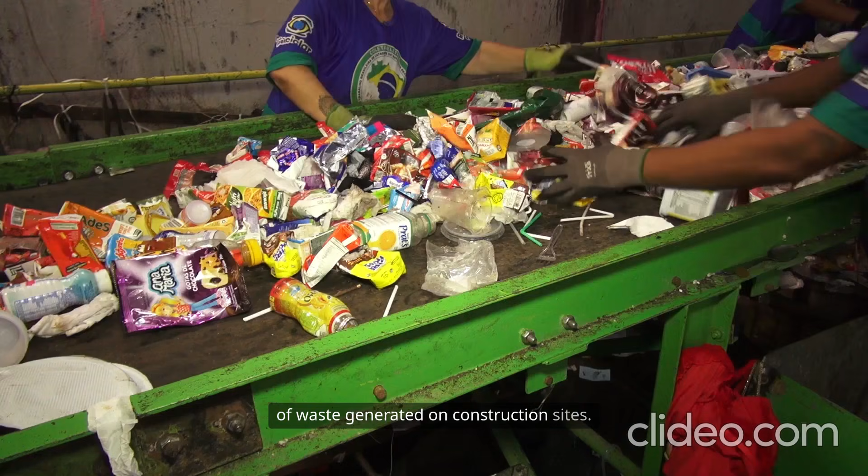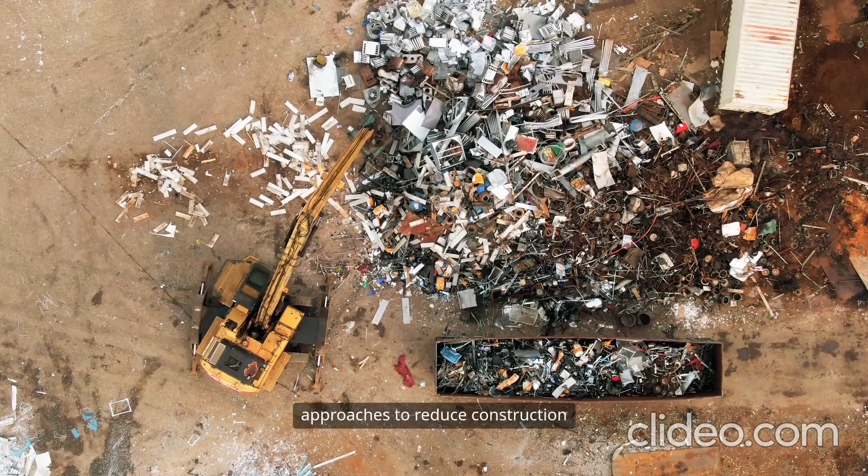Sustainability in construction is essential for minimizing the environmental impact of waste generated on construction sites. Effective waste management not only conserves resources, but also supports the socio-economic development of communities. By analyzing various sustainability theories and models, we can identify innovative approaches to reduce construction waste and enhance project outcomes.

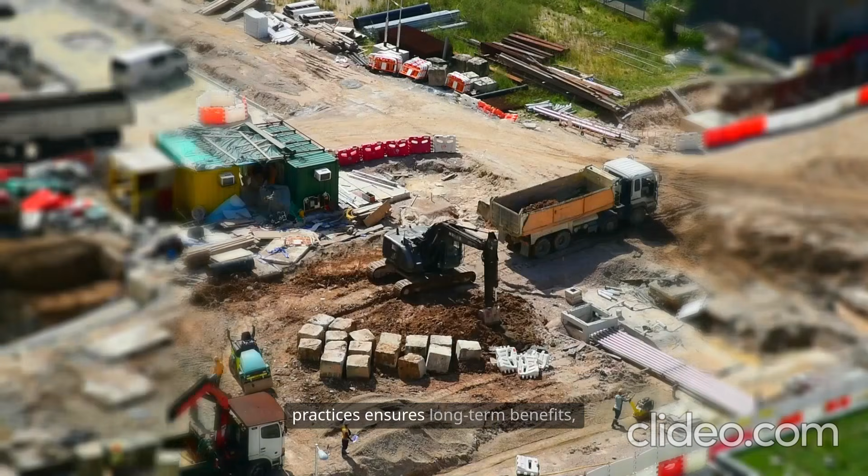Technologies such as simulations help streamline cross-border projects and optimize waste management strategies. Ultimately, adopting sustainable practices ensures long-term benefits, while policy recommendations drive industry-wide improvements.

The study analyzes the sustainability of construction projects by effective waste management. The sustainability theories and models are evaluated for the sustainable development of construction projects. The construction industry is an important factor, playing a crucial role in bringing about socio-economic development in the country. Hence, waste management at construction sites is essential for resolving detrimental impacts on the environment and surroundings.

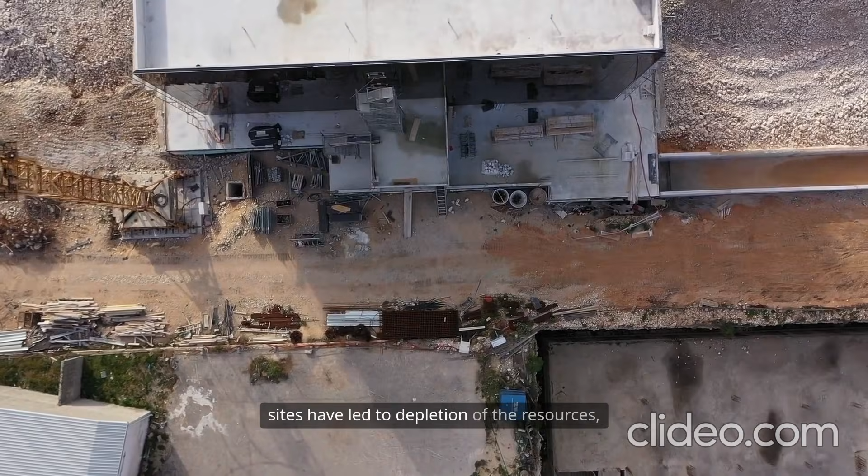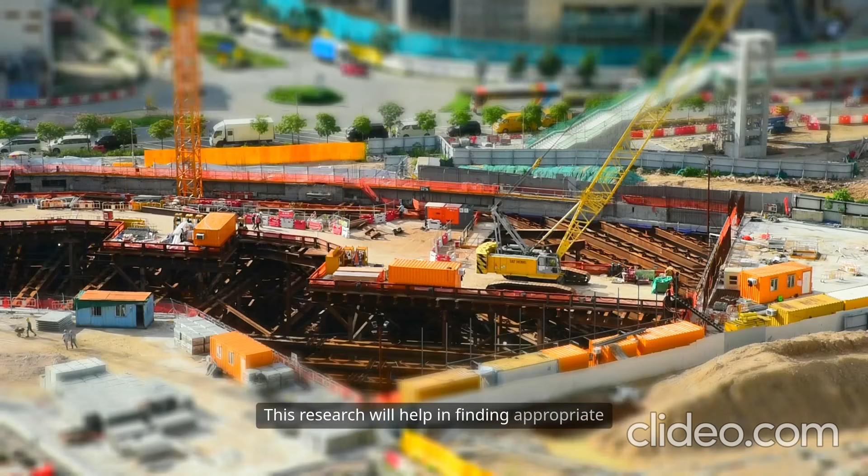The wastes generated at construction sites have led to depletion of resources, thereby giving rise to the need of adopting sustainable construction. Moreover, the use of technology to achieve simulations in cross-border construction and associated waste management, while achieving the simulated working approach of the stakeholders, has also been described in depth. This research will help in finding appropriate methods for waste management in the global construction industry.

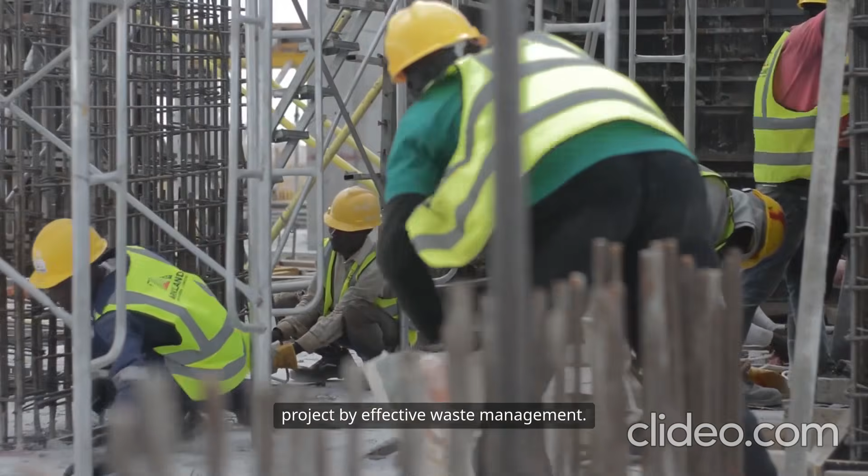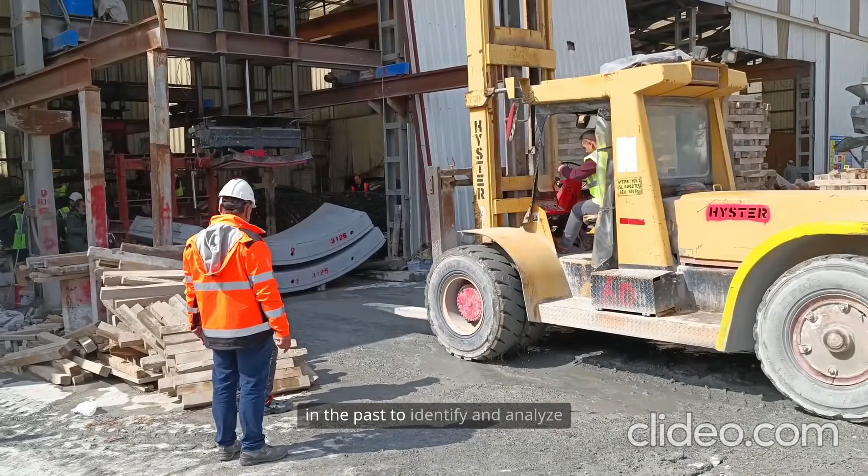The following study is a research proposal that aims to analyse the sustainability of construction projects by effective waste management. The relevant theories and models are analysed to explore the sustainable development of construction projects. Numerous researches have been performed in the past to identify and analyse the detrimental impacts of the construction industry on the environment.

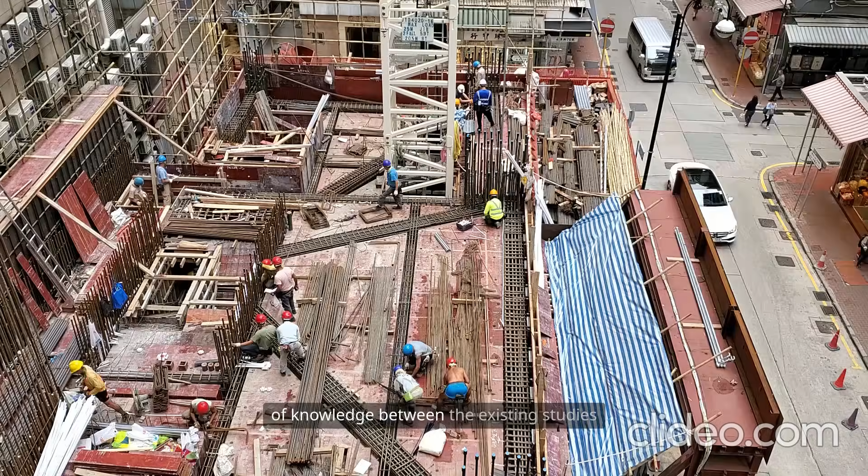However, not many of them have been able to highlight the management techniques that could be used to ensure sustainability in construction. In this section of the study, the gap of knowledge between the existing studies and the knowledge obtained by this particular research will be discussed.

In the study conducted for analysis, the challenges related to solid waste management in developing countries have been discussed. Here, the researchers have successfully identified the detrimental impact of waste generation over natural development, but they have loosely focused on the construction industry particularly.

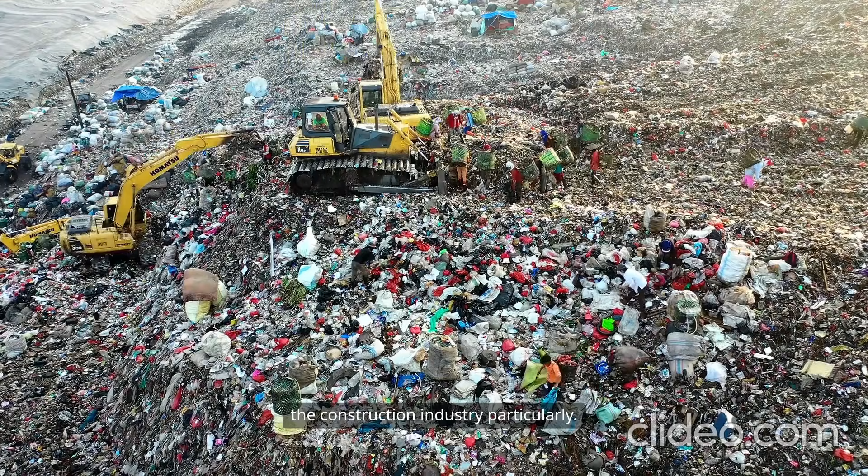Sustainable construction has been referred to as the progressive way in which development can be continued without avoiding the responsibility of taking care of the natural environment; a similar study was performed. In that study, the researchers have formulated a strategic implementation model for sustainable construction waste management, but they failed to specify the economic theories and models that were used for formulating the strategic model.

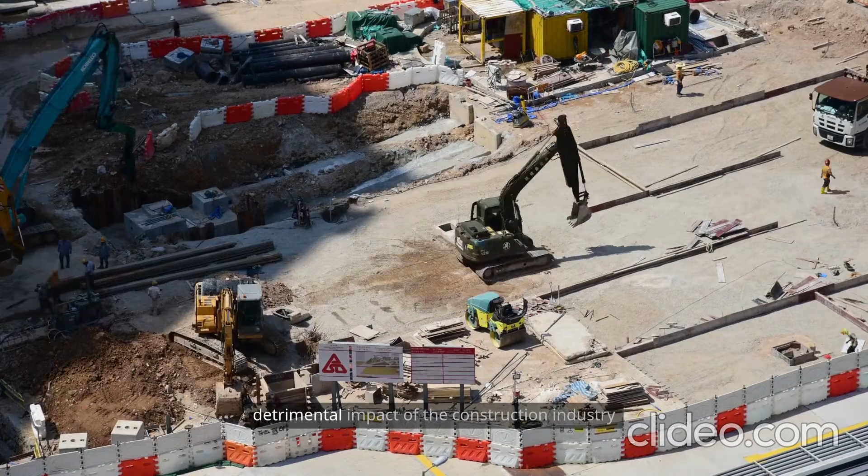The above researchers may have identified the detrimental impact of the construction industry over natural development, but none of them have been able to focus on sustainable development by waste management techniques. Therefore, this particular research will not only identify the gap of knowledge with previous researchers, but also makes an attempt to mitigate them.

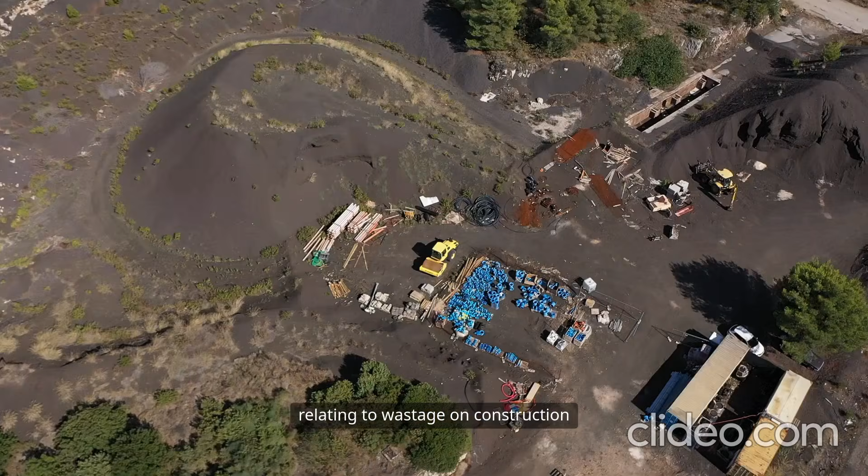Therefore, the present research aims to focus on sustainability in construction relating to wastage on construction sites, with the use of appropriate models and theories of construction.

The UK government has taken some drastic steps for minimising pollution due to wastage. For this purpose, the government of the country has surveyed that around 35% of the total wastage generated in the country is due to bad engineering standards.

Therefore, it has been taken as one of the most important actions to minimise wastage by implementing a proper waste management strategy at the government level.

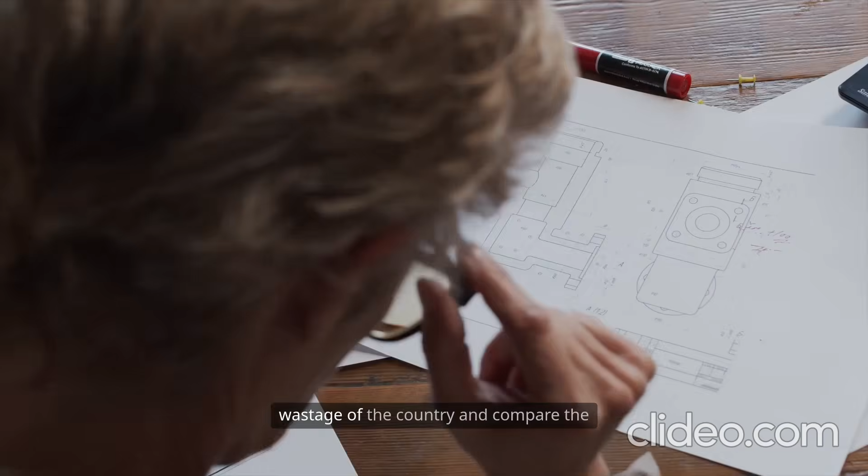In 2015, the UK government formed a special committee which shall notice the wastage of the country and compare the wastage data with other European countries.

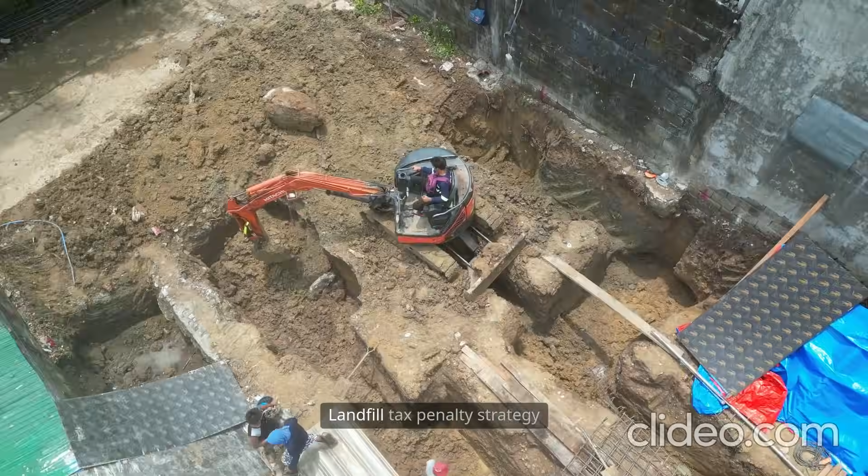The Special Task Force has also been formed by appointing engineers and environmental scientists in the current year. Landfill tax penalty strategy has also been taken as a step for measuring wastage in the UK.

GBP 84.40 per tonne has been set out to charge construction companies to optimise construction wastage.

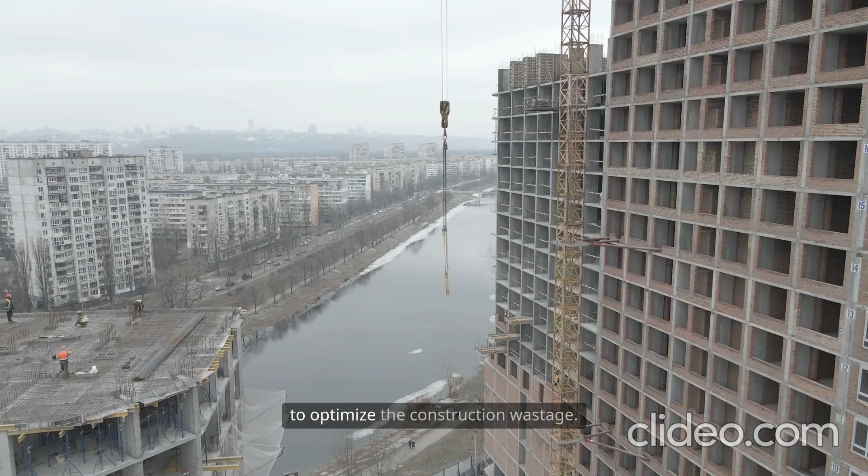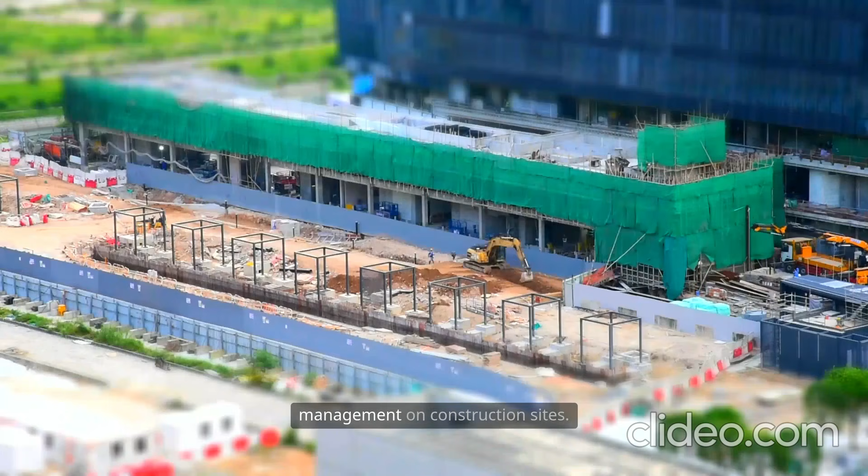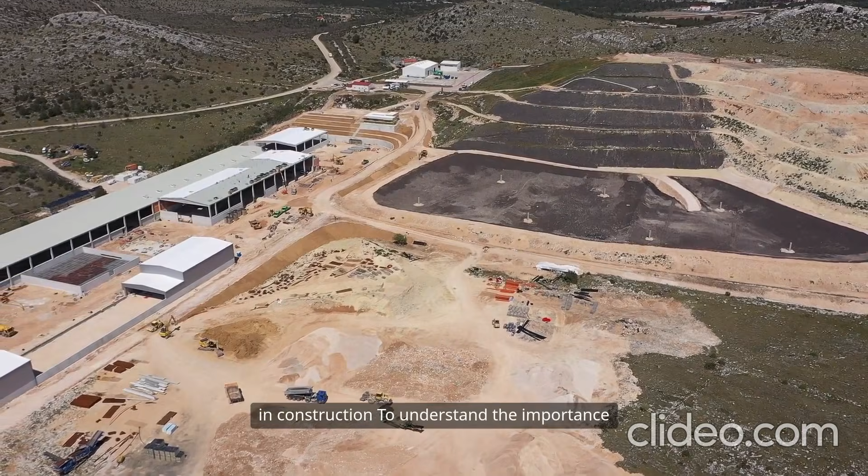The study aims to understand and analyse the needs and impacts of sustainability in construction relating to waste management on construction sites. The following are the primary aims of the research: to evaluate the impact of wastes generated at construction sites on sustainability in construction, and to understand the importance of waste management to attain sustainability in construction.

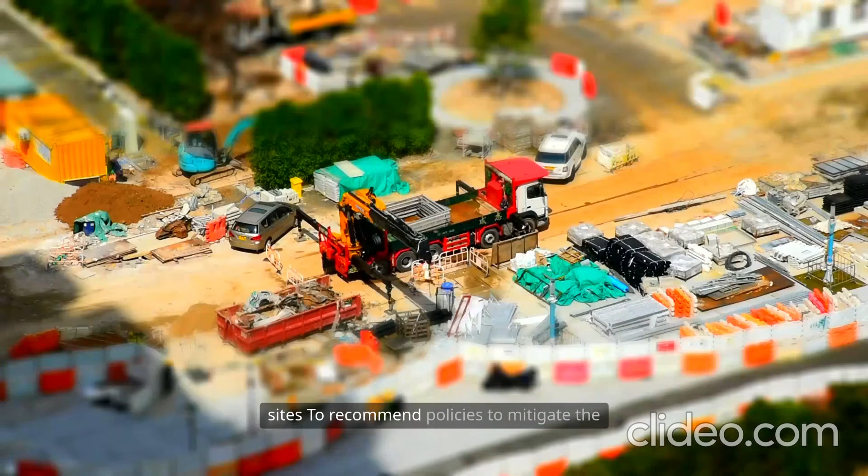The following are the subsidiary objectives of the research: to compare and contrast the various waste management practices which are already in use or have potential future application scopes, to develop a model for waste management on construction sites, and to recommend policies to mitigate the problems related to waste management systems at construction sites.

Based on the findings from the statistical data obtained, the research will make valuable contributions in the evaluation of sustainability in construction relating to wastage on construction sites.

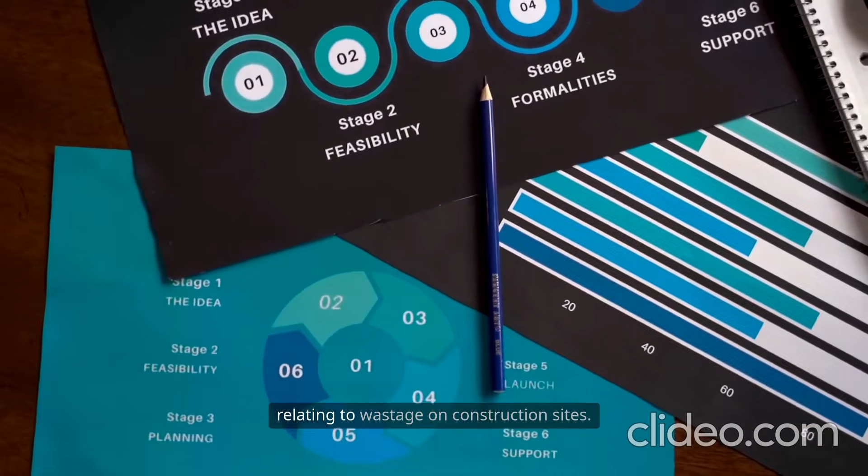With the use of the following theories and models, the sustainability of the construction industry can be analysed in terms of sustainable waste management: the theoretical framework of sustainable waste management at construction sites. With reference to these theories of waste management, the researcher can evaluate the contribution of existing literature on sustainability in construction relating to wastage in construction sites.

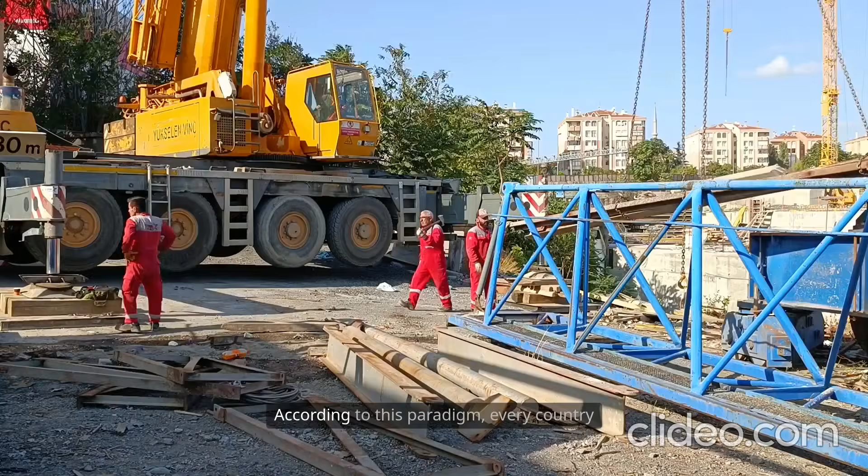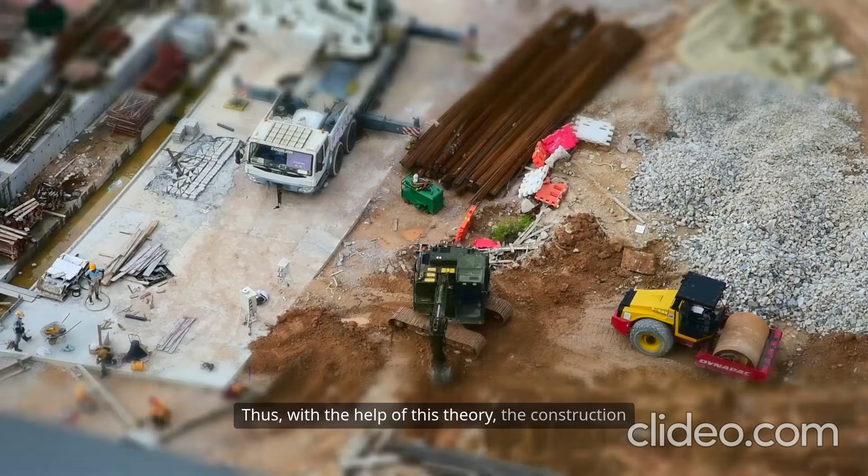Land management paradigm: this modern theory of land administration takes into consideration the tenure, value, use and development of land (Faniran and Caban, 2012, p.182). According to this paradigm, every country makes use of various tools and techniques to frame land policy goals to manage land resources (Flick, 2015). Thus, with the help of this theory, construction companies in the UK would be able to design suitable strategies for handling the resources required for construction works.

Natural capitalism: according to this theory, there are only three forms of capital, namely land, labour and produced capital resources (Madawar et al., 2013, para 872). Only these three forms of capital are to be used for evaluating sustainability in construction. Therefore, the natural capitalism theory might be of immense importance for UK construction companies, as organisations might be able to evaluate the type of land, labour requirements and resources required, which would help in waste elimination.

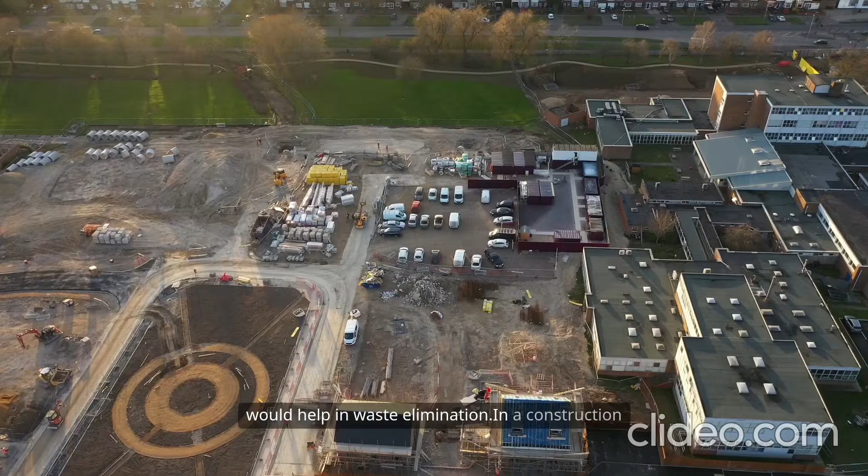In a construction site, four main components are required to meet the requirements of the setting. The component of radical resource productivity helps to obtain similar or excess amounts of productivity from the utilised resource. It helps to maintain and earn profit in the construction business.

Sustainable solutions for different kinds of challenges are obtained from the component named biomimicry. Service and flow economy helps to control the expenditure of the construction business (Pietrosemoli and Monroy, 2013, paras 683). Finally, it handles the existing issue in the current condition. Utilisation of natural capital is a requirement that helps to accomplish the entire justification of the site setting.

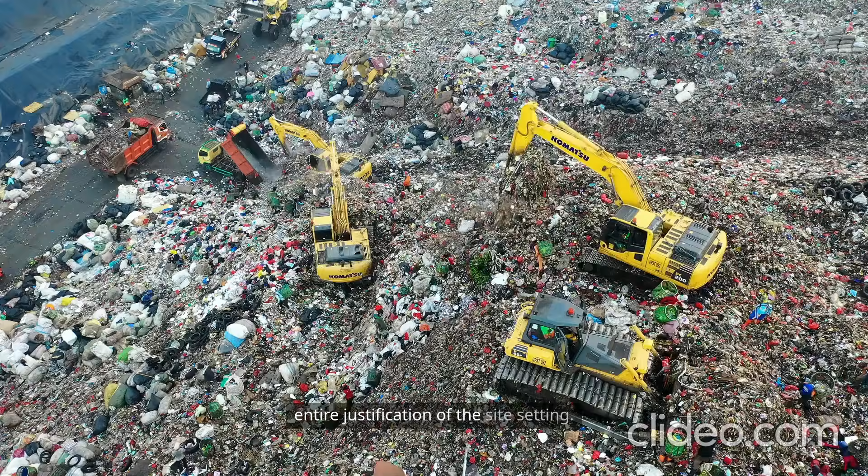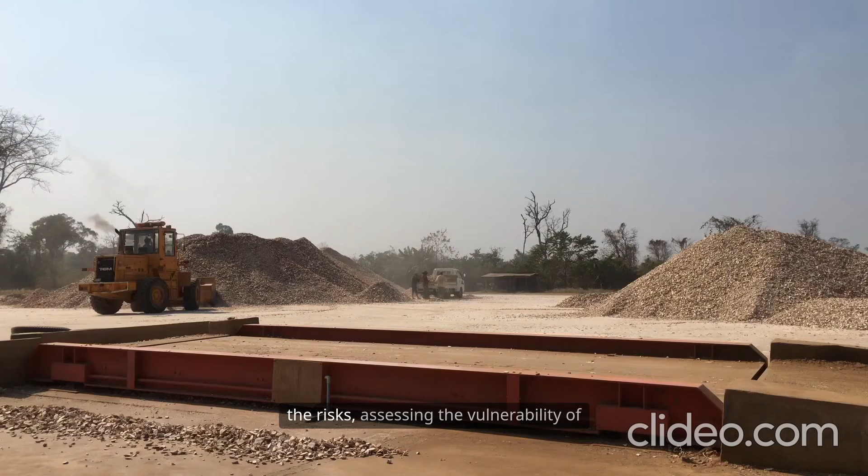Risk management: according to the theory of risk management, there exist 5 phases of waste management. These include identifying and assessing the risks, assessing the vulnerability of the assets to specific risks, determining the consequences and probability of facing the risks, identifying the measures of reducing risk, and prioritising the measures of risk reduction.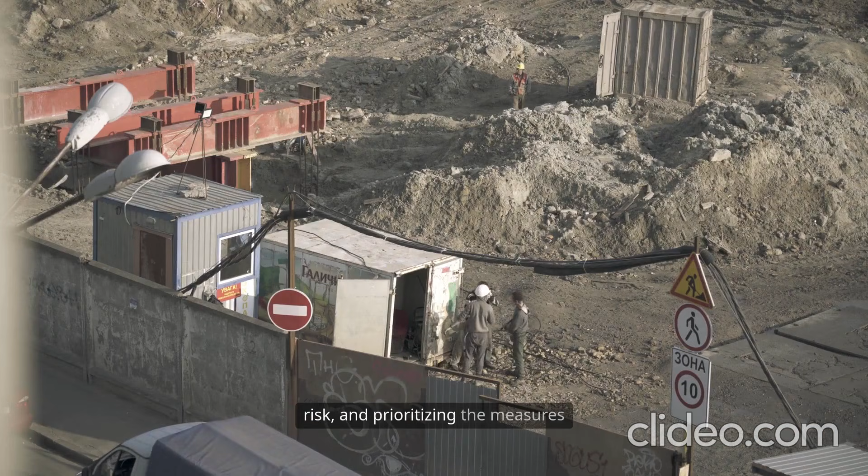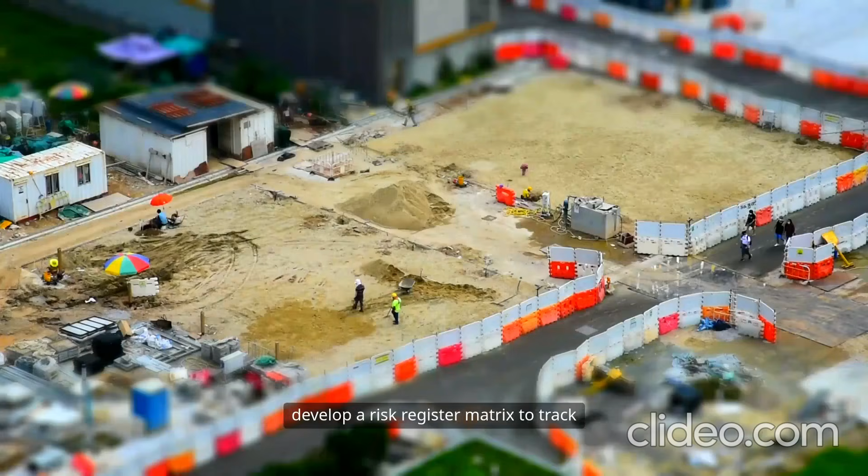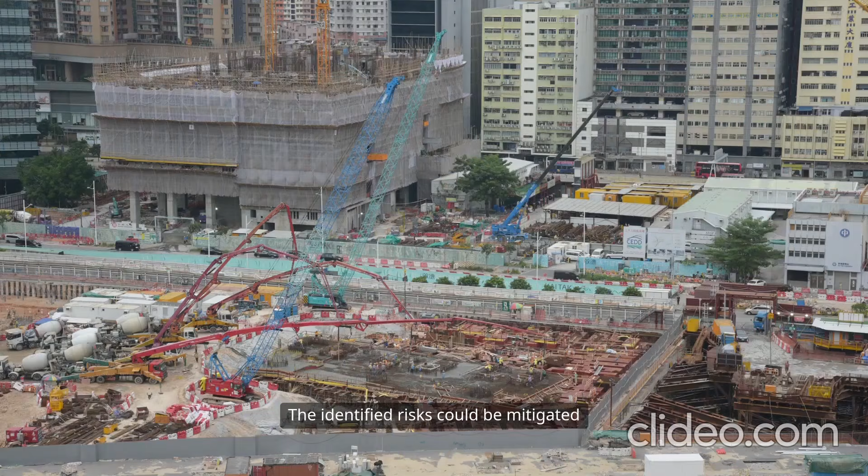(Gaston Ledford, 2014). Thus, UK construction companies could develop a risk register matrix to track all the risks associated with the construction sites and assign each personnel within the organisation to mitigate such risks. The identified risks could be mitigated with appropriate action plans, which would lead to efficient waste management in the construction sites.

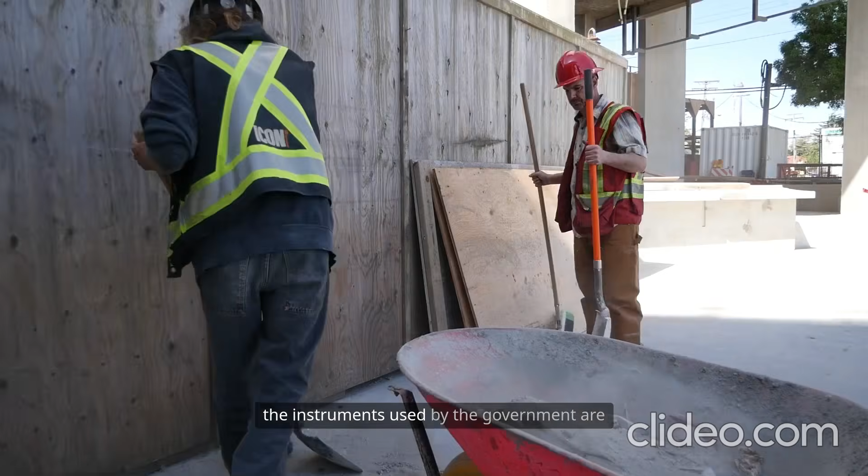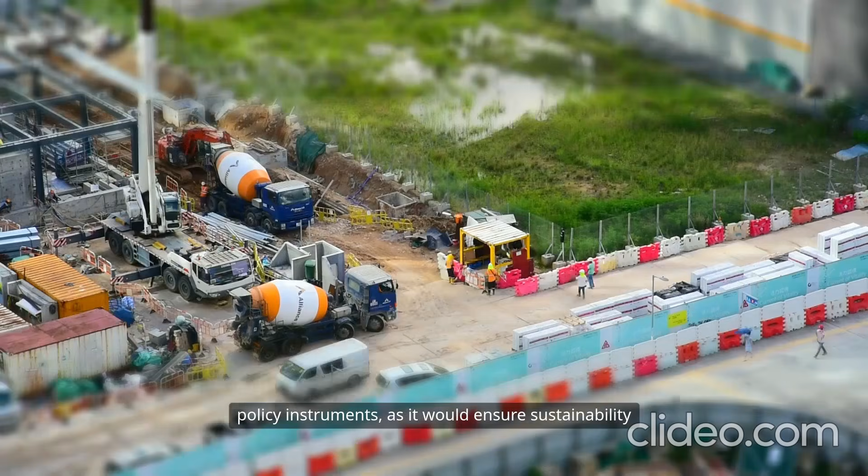Public policy instruments: in this theory, the instruments used by the government are used for the implementation of policies and achievement of the goals of sustainability. It is inclusive of the methods of mandates, inducements, building of capital, changing systems, and the policy of hortatory. Thus, UK construction companies need to make effective utilisation of public policy instruments, as it would ensure sustainability in construction and reduction in wastes.

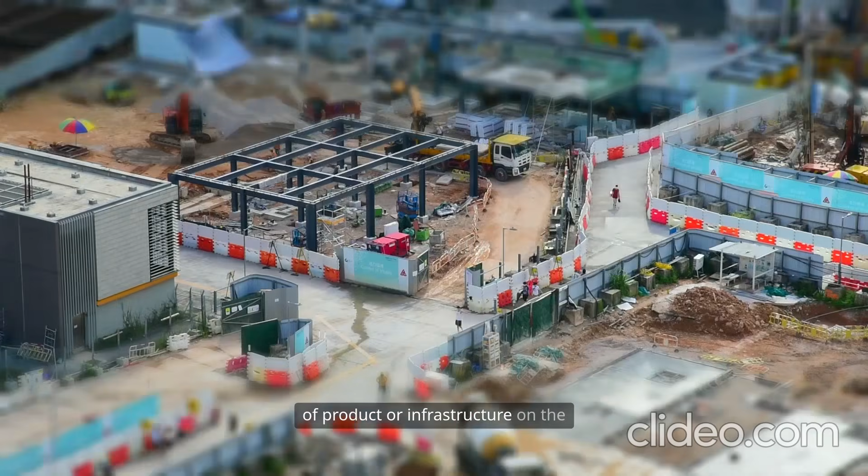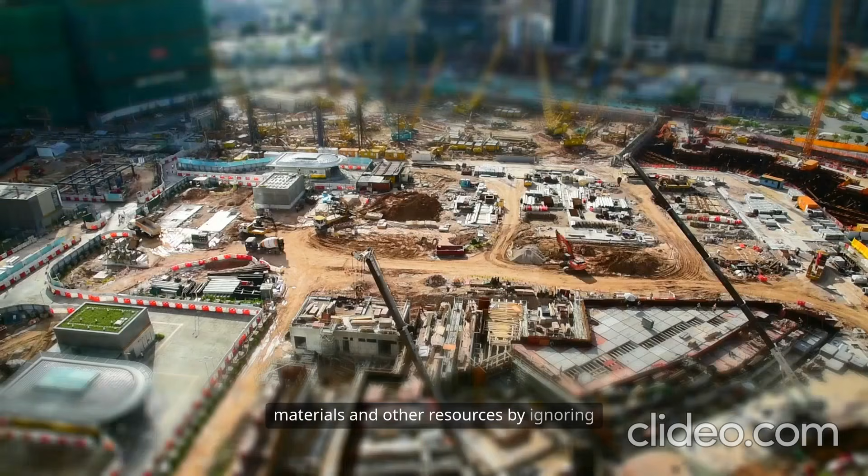Life Cycle Analysis Matrix: this theory identifies the possible impacts of a product or infrastructure on the environment, people, and the economy. Hence, construction companies in the UK need to choose the right suppliers for accumulating higher quality raw materials and other resources by ignoring pricing structure alone. In addition, the use of higher quality materials would reduce wastes while maintaining sustainability in construction works.

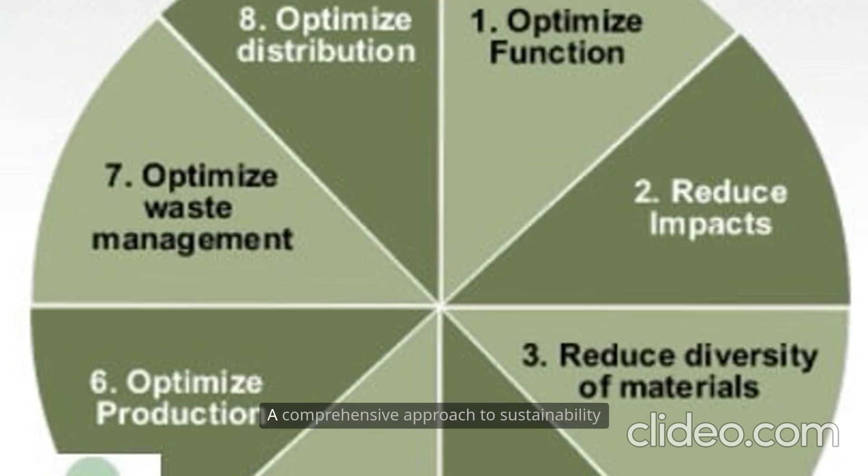A comprehensive approach to sustainability in the UK construction industry involves several key theories and tools. Cost-benefit analysis helps organisations estimate project feasibility by considering both tangible and intangible benefits, informing budget and quality control techniques.

Spatial data infrastructure hierarchies facilitate efficient cross-border collaborations and improve decision-making. The eco-strategy wheel, combined with Six Sigma, drives waste reduction and eco-friendly production methods.

Adaptive management and the sustainability maturity model guide project planning and risk assessment, while Moore's strategic triangle emphasizes public value and effective resource use. Cost-benefit analysis.

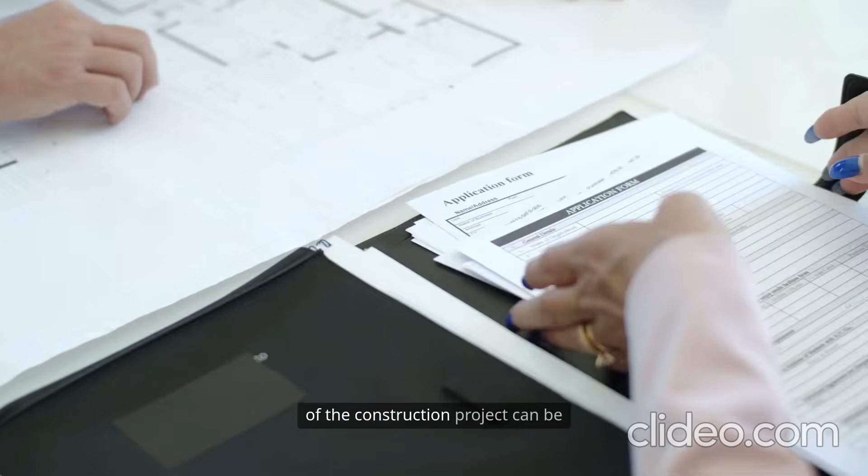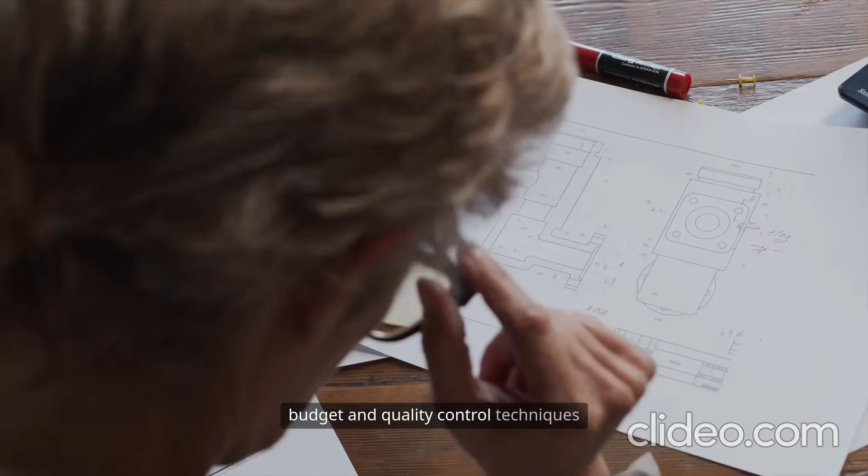This theory assesses the feasibility of the construction project, and hence the sustainability of the construction project can be achieved by feasible cost-benefit analysis. In order to undertake the construction works, possible estimation of the costs and the tangible and intangible benefits are required to be taken into consideration. Thus, with the help of this specific analysis, the organisation would be able to devise budget and quality control techniques to ensure construction sustainability. Spatial Data Infrastructure, SDI.

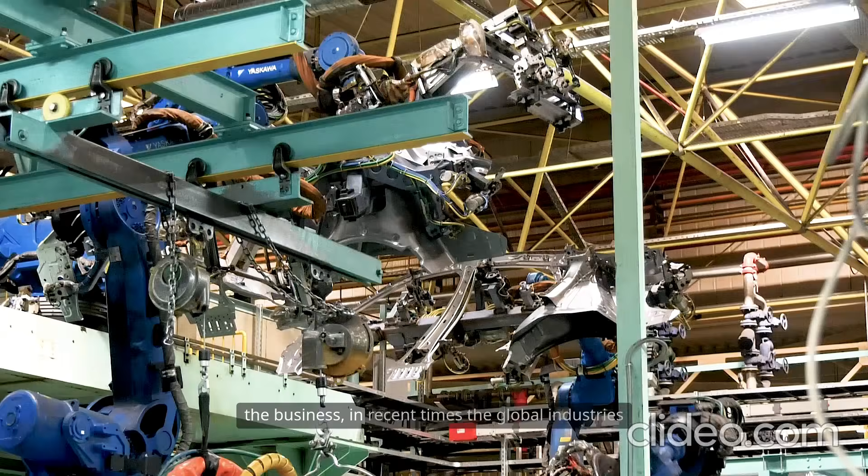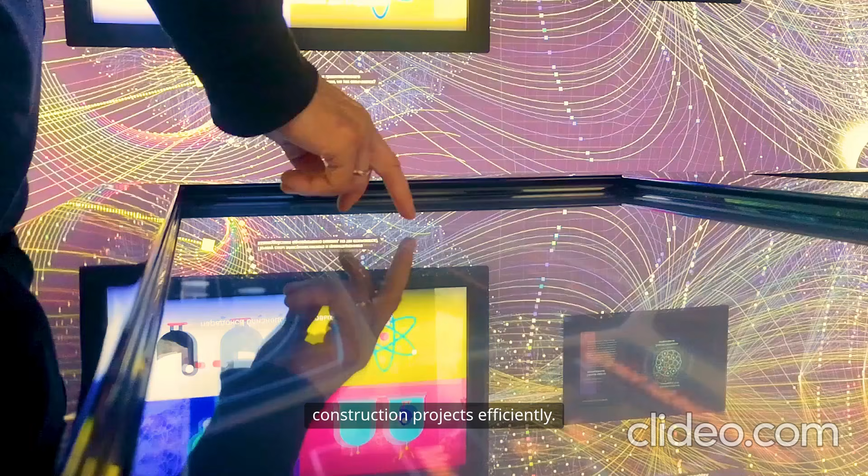The various SDI initiatives are developed on state, national, regional, and global basis. The development of SDI is attained within each of the disciplines in order to improve the decision-making process, keeping the idea of sustainability in mind. Hence, compliance with this theory would help the UK construction companies to minimise waste in the construction process, along with maintaining environmental sustainability. Eco-strategy wheel.

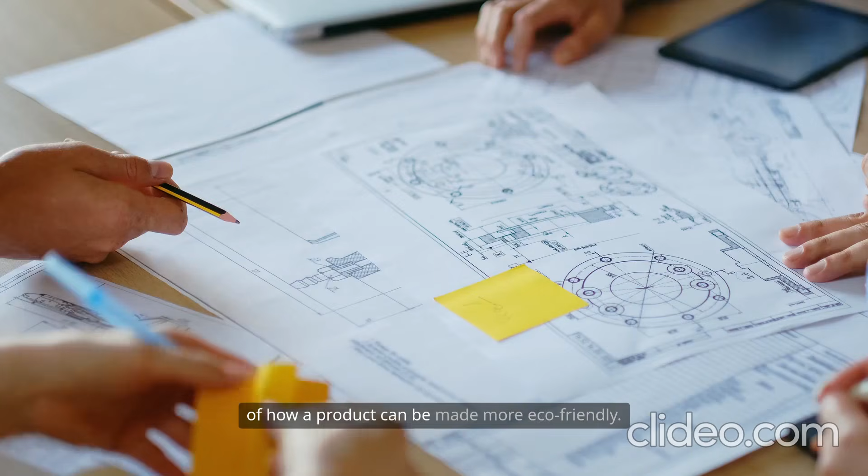The eco-strategy wheel is a valuable tool that helps in the evaluation of how a product can be made more eco-friendly. It also serves as a stimulation for introducing new, improved techniques of production that are more environment-friendly. Hence, the construction companies in UK need to implement the technique of Six Sigma to reduce waste in the operating process and ensure higher quality of work. Hence, eco-strategy wheel could help to maintain sustainability in construction through effective quality control techniques.

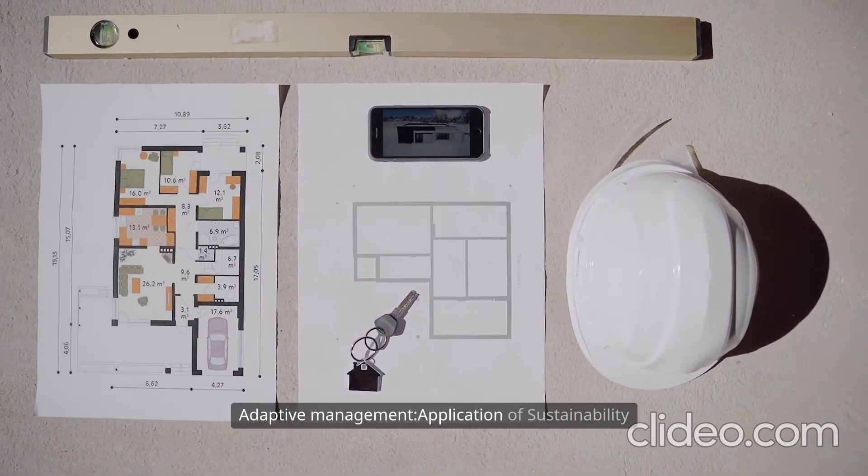Adaptive management. Application of sustainability maturity model. In the case of the construction industry, this model will follow the preliminary steps of project planning. The second step will involve gathering information regarding risk assessment and further changes associated with the project schedule. Through SDI analysis, responsibilities are required to be delegated, which will be the core activity in the third step. The fourth step will be construction itself, while managing waste simultaneously. The last step will help in managing waste sufficiently.

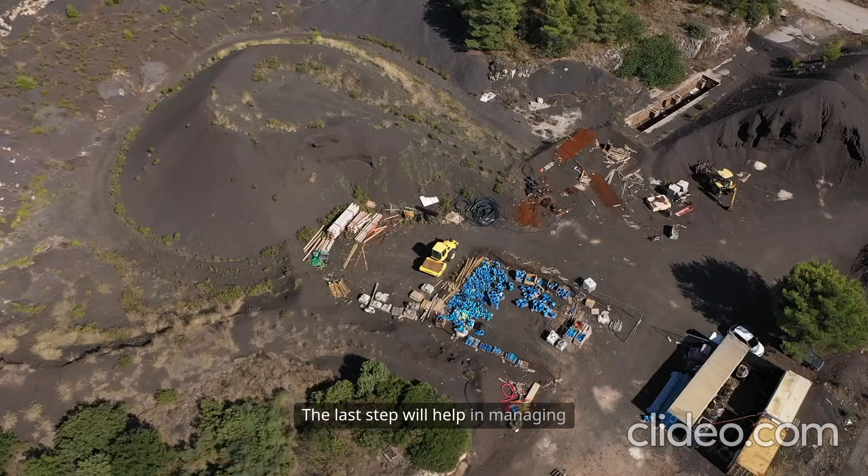The waste generated from construction sites is becoming a pressing issue for a developed country like the UK. It puts huge impact on the environment as well as on human life. However, such issues can be resolved when the entire community works collaboratively and implements new strategies for controlling waste and enhancing sustainability.

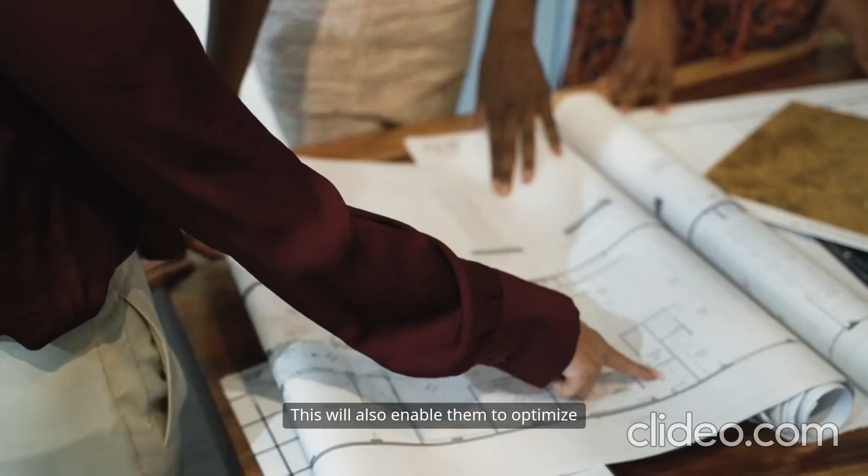It is important for every individual to understand the importance of managing waste so that it enables them in attaining sustainability. By utilising the eco-strategy wheel, UK construction industry can reduce waste in a systematic and operating process. On the other hand, the land management paradigm can be taken into consideration, which will make sure of selecting right techniques and tools in managing land resources.

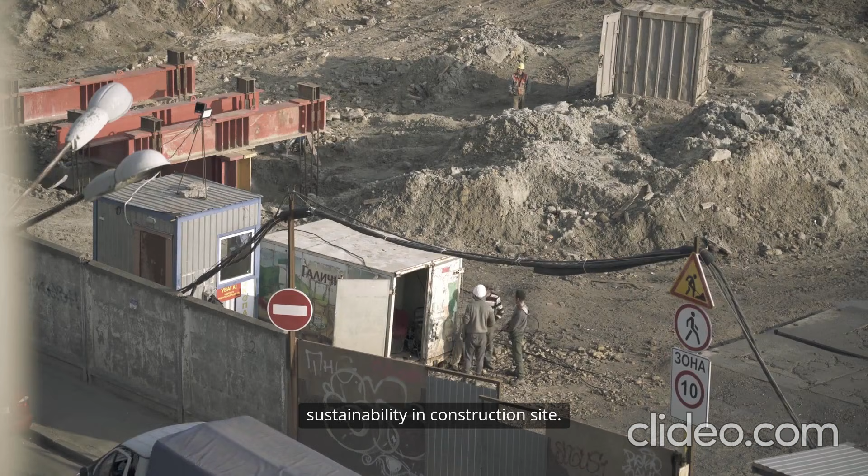This will also enable them to optimize production and select right materials in order to minimize the impact of waste. Moreover, the eco-strategic tool will ensure good work quality by maintaining sustainability on the construction site. However, the research is valid enough as it will motivate and suggest the construction industry in managing waste by utilizing good quality materials and making effective planning. The construction industries in UK need to implement their policies in order to achieve sustainable goals. Hence, by adopting such waste management techniques, the UK construction industries can upgrade their quality of performance by making reasonable changes which will lead towards success.

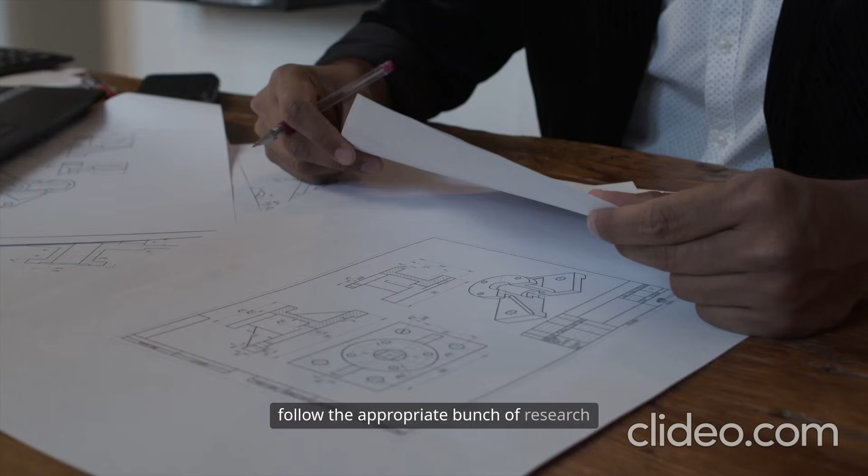The relevant theories and models are analysed to evaluate the sustainable development of the construction project. In this research, the researcher will follow an appropriate set of research techniques and tools, which will help in waste management in the construction industry. Additionally, these waste management techniques will also help in the better management of the respective environment and maintain the sustainability of the industry.